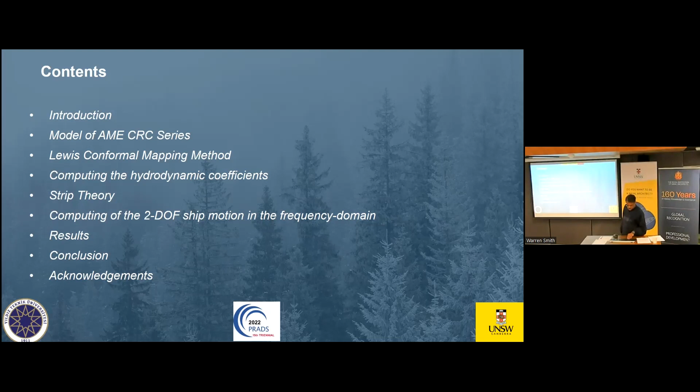So the aim is to validate the frequency domain sea-keeping code presented in this paper. We have done that MATLAB code. We are going to present some of its results along with the experimental data which we had for the AMECRC series. And I'll also give you a brief about the AMECRC series, the series that we are dealing with.

So we are presenting right now only the heave response amplitude operators for the AME-CRC hulls in head sea conditions, because that was the only experimental data we had. So if it appears to be good enough, then we can also use the same code for following seas, oblique seas and beam seas as well. So results were compared against experiments, and we'll go through some of this.

And this is the model of the AME-CRC series. The AME-CRC series consists of 14 models, and they have an L/B ratio from 4 to 8, a B/T ratio from 2.5 to 4, and CB values from 0.4 to 0.5. And there were a lot of participants, including AMC, UNSW Sydney, UTAS in Hobart, and the University of Western Australia in Perth.

They were all involved, plus several industries, including what at that time was called Tenix. Now it is called something different, right? In Melbourne, Thales, right? And then we also had the Garden Island industry involved. So a lot of people, a lot of effort has gone into developing this AME-CRC systematic series to see what it can be used for.

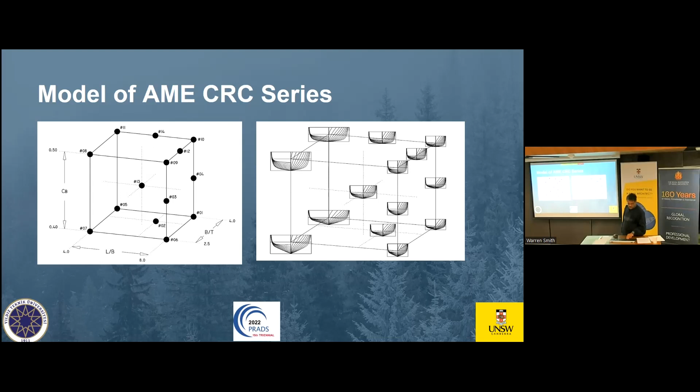So the good thing was that I was in charge of that particular program in the CRC when it was there. So I have used this, and people have actually taken the data and did consultancy work based on those published data and internal reports.

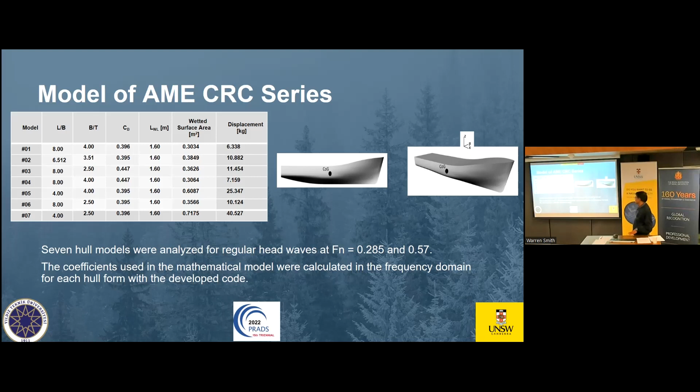So from the AME-CRC, we have taken 7 models, and the 7 models are published here. As you can see, we have not taken all the 14 models, and all the 7 models were analyzed for regular head waves at 2 different Froude numbers, 0.285 and 0.57. And the coefficients were calculated in the frequency domain with the developed code, and then subsequent analysis was made.

So the Lewis conformal mapping method, as I mentioned earlier, is trying to find the transformed section, because Ursell's procedure was for circular cylinders, circular sections, but the ship shape is not a circular section. So we have to do the mapping here. In order to calculate the added mass and damping coefficients, the cross section of the hull has to be mapped.

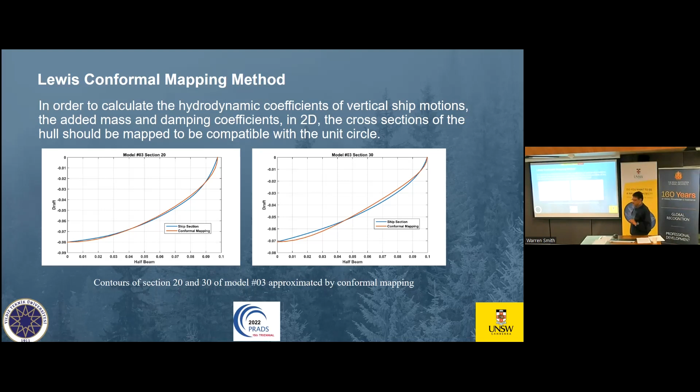So Ray was talking about mathematics. So here's the amount of mathematics that we have. Multipole expansion theory, conformal mapping method, and integral equations are coded to calculate the hydrodynamic coefficients. This is the entire maths. I'm not going to elaborate on that. There was plenty of maths in my initial stage, which I am skipping to go further.

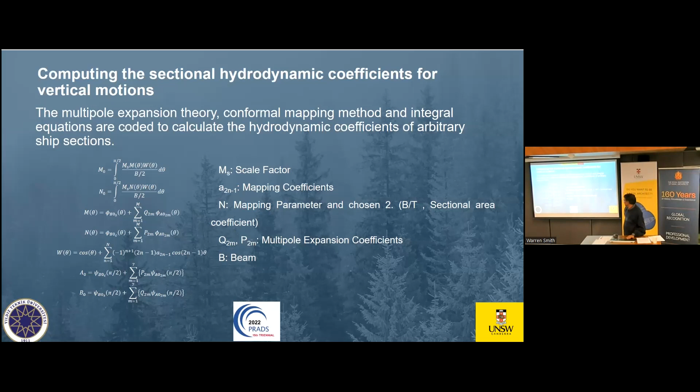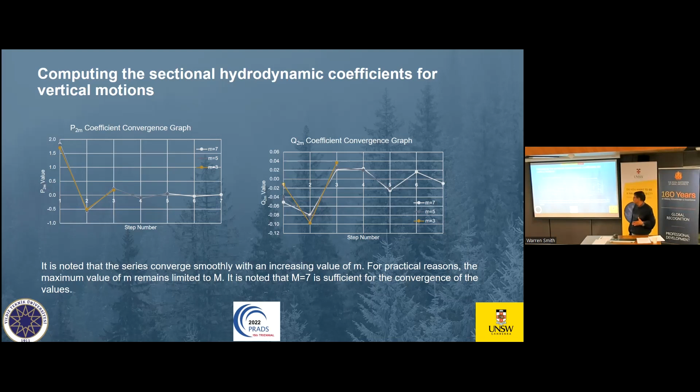So we have to see that convergence occurs. There are two components here, P2M and Q2M, and it has been found that when M is approximately equal to 7, suitable convergence happens, and that's where we generally stop. And the sectional hydrodynamic coefficients, like the added mass and damping coefficients, are then calculated based on the mathematics I showed you on the previous slide.

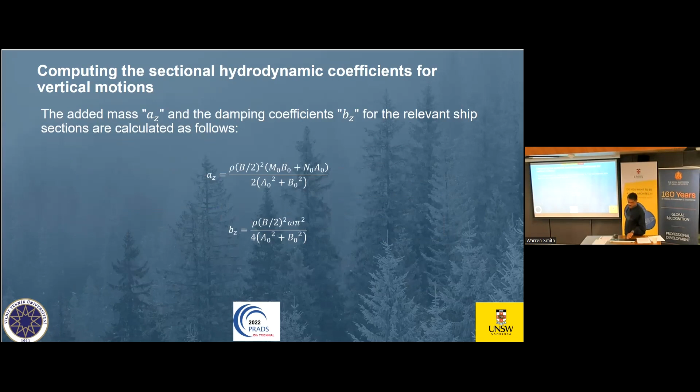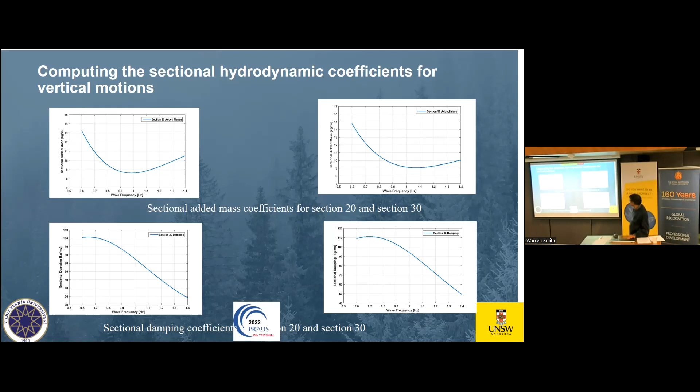The sectional hydrodynamic coefficients, as you can see, are similar to the literature, especially the curves published in Dynamics of Marine Vehicles by Rameswar Bhattacharyya. You will come across similar curves looking at the hydrodynamic coefficients of ships. Now, this is the sectional damping coefficients for section 20 and section 30 for model number 3. We are not presenting all the models here, but some examples.

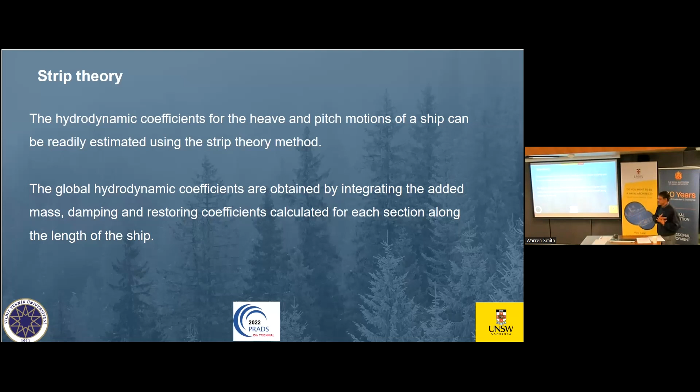Added mass and damping coefficients. The hydrodynamic coefficients for the heave and pitch motions of a ship can be readily estimated using the strip theory method, which you all know. So the global hydrodynamic coefficients are obtained by integrating the added mass and the damping coefficients over the entire length of the ship, which we all know.

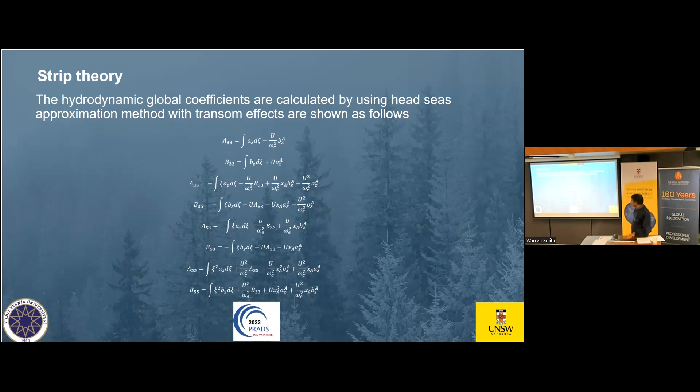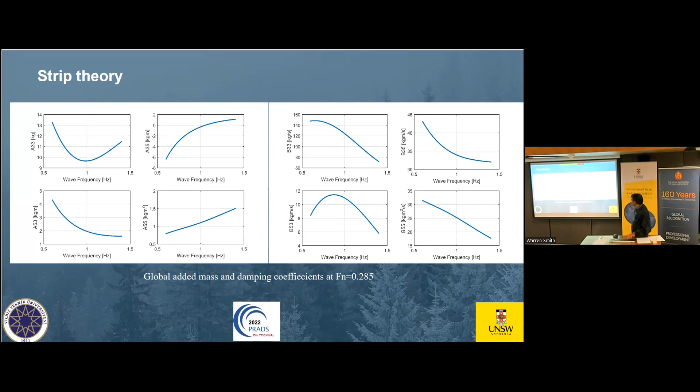And these are the expressions for calculating the added mass and the damping coefficients for the entire ship throughout its length. The integral sign implies that we are integrating over the entire length here. So now we have global added mass and damping coefficients at Froude number 0.285 for this model number 3.

And we have used the Salvesen method here, the damping for the cross section, the global excitation wave terms, because unless we know the wave terms, we are unable to calculate the forces. So that is why we have used the Salvesen method to compute the excitation force, which is now applied here. So you can see that there is a Froude-Krylov part, there's a diffraction component, etc. So this is the mathematics behind it.

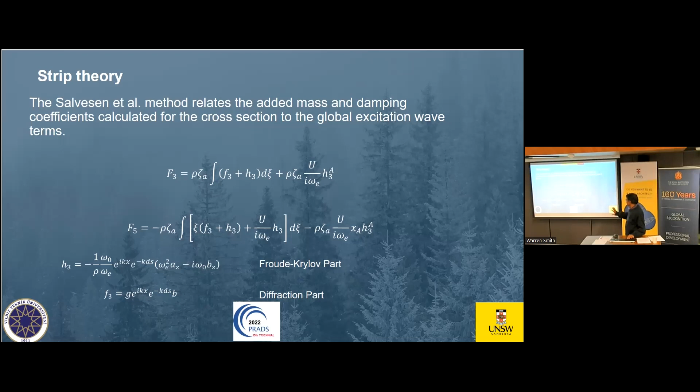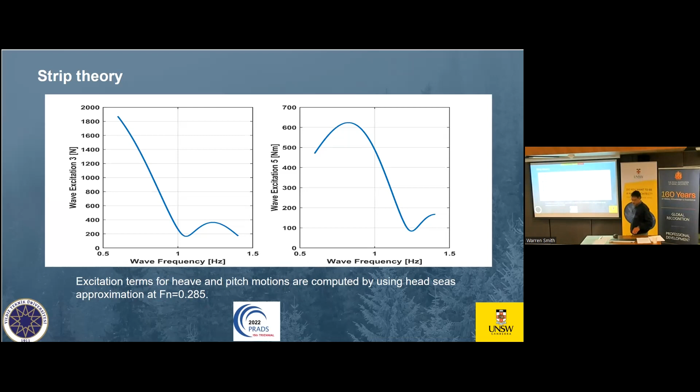We are not going to touch this here under any circumstances, but these are the excitation terms in heave and pitch. The left one is about the heave, the right is about the pitch at different frequencies from 0.5 to 1.5 hertz, and at Froude number 0.285.

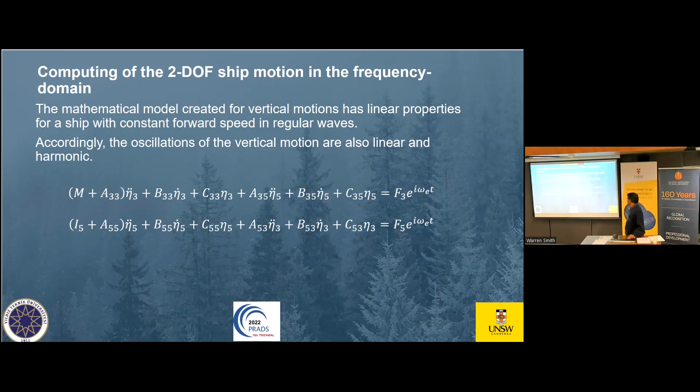So now in frequency domain, this is the mathematical model which is created to calculate the vertical motions, the pitch and heave motions. The subscript 3 represents heave and F5, the subscript 5, represents pitch. So in order to obtain the response amplitude operator, it has to be developed into a matrix form.

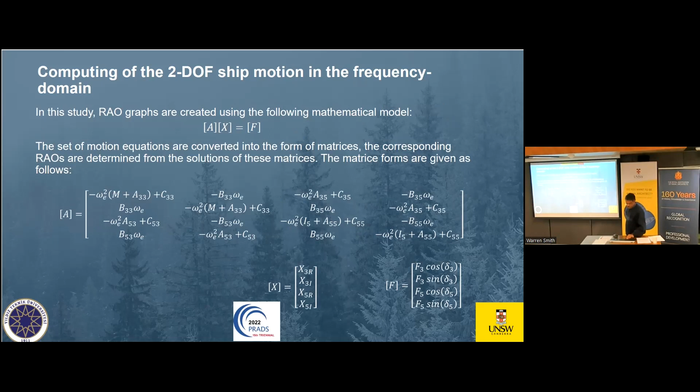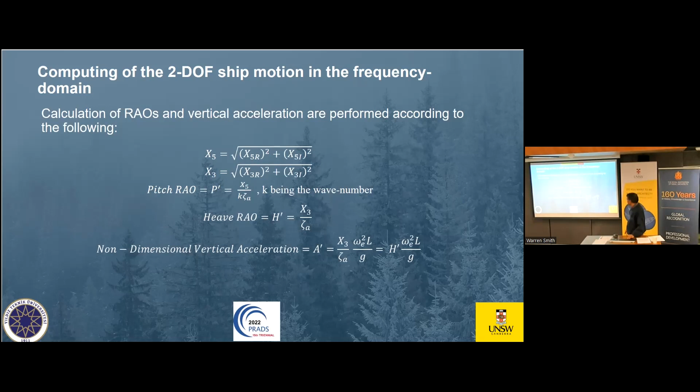So X3 represents the heave, X5 represents the pitch, and pitch RAO is non-dimensionalized with wave amplitude and the wave number. And similarly, the heave amplitude is also non-dimensionalized with wave amplitude. And the vertical acceleration is also non-dimensionalized by using the frequency and acceleration due to gravity here.

So some of the results that we are going to see here are this. So that's the results for model number 1 at 0.57. The experimental data is the circular dots, and the red line is actually from the coding. You can see the experimental data and the results the code produced have a good match. I will not say exact, but at least a good match. So it gives us confidence that these results seem to be

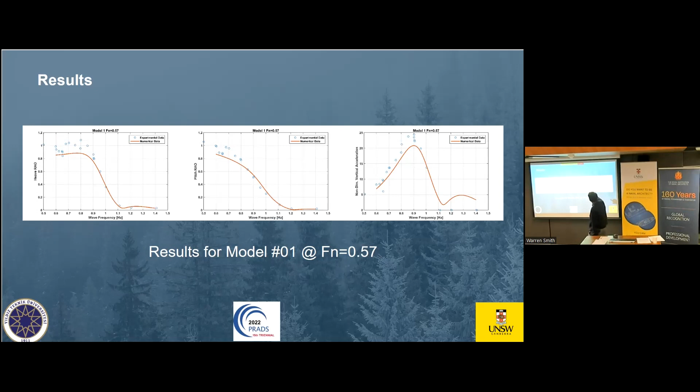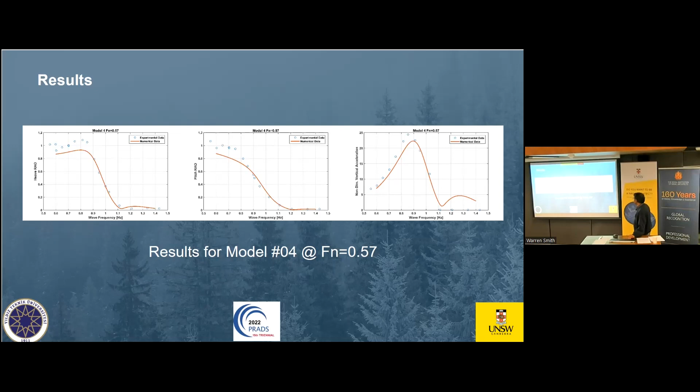0.57. So in conclusion, the test results of the series were examined to validate the seakeeping code developed in the frequency domain. The numerical data were compared with the test data, taking into account the uncertainty of experiments. Now, we want to know how good the experimental results are. It is a known fact that however well you do your experiments, there might be some level of human error which might creep into it, and your data may not be as good as you think it is.

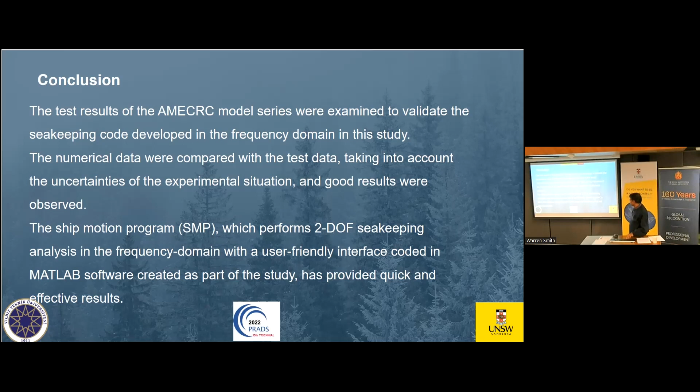And we think that the ship motion program that has been developed in MATLAB performs quite well in predicting the heave, the pitch RAO, as well as the non-dimensional acceleration of those particular sections for the global movement. So we are happy with that. And as I mentioned, this is going to be presented at PRADS 2022, and it was supported by Yildiz Technical University, where I have also spent 2 months of sabbatical leave to do some teaching.